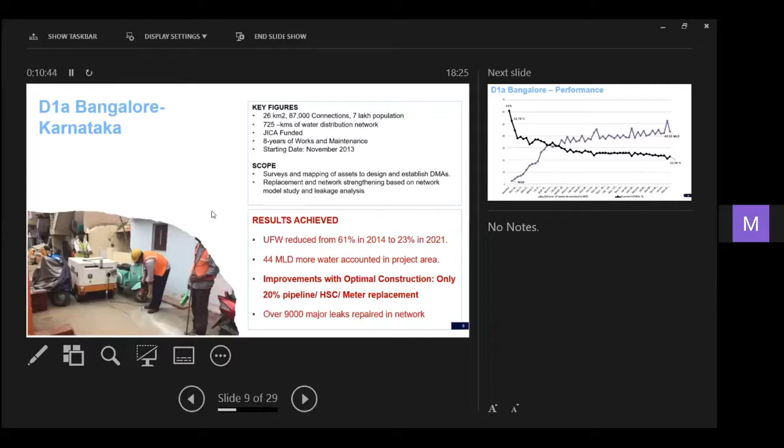It's stuck. Maybe just 1 second. I'm sorry, my laptop is stuck.

Yeah, okay. So as you can see from this slide, when we took over the project, I would say the initial baseline was 61%. And as we completed construction and while we are maintaining through a very, very intensive leak detection process, the UFW as of March 21 is 23%. So there is a kind of reduction which we have managed to achieve.

Here again, as I said, the project was a loss reduction contract, and that was the metric, that was the KPI. Since this was the UFW project, we have actually managed to go from almost 2 MLD of accounted for water to, as of March 21, about 43-44 MLD of water which is accounted for. That is the kind of volume of water which now can be used to supply more to the same area.

So, similarly, Davanagere, I will use this as an example to explain how a typical contract in Karnataka is. This is a standard ADB structure. Many of you probably would know it's about a 3-4 hour drive from Bangalore city on the Bangalore-Pune highway. It's got a population of 500,000 people with about 100,000 connections.

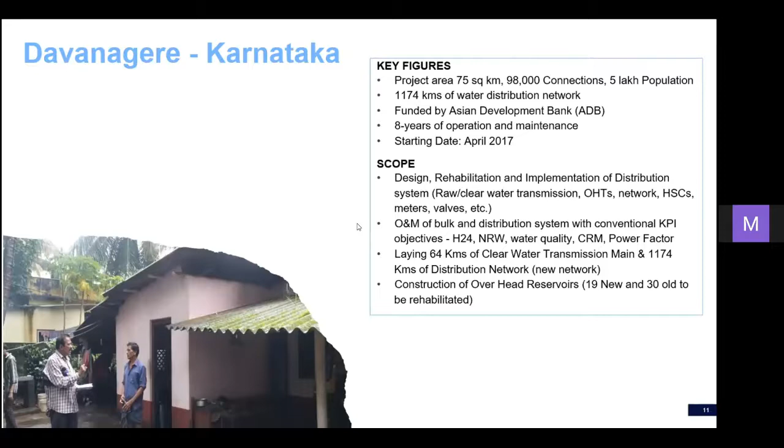Okay, this is the ADB funded project and the project has got 4 phases. The contract very clearly spells out the 4 phases over the 12-year contract period. Here the tender said that the consultant had done an intensive study for 2 years before they made the DPR, on the basis of which the tender has been launched. So they didn't want the operator to come in and spend another 1 year in the study period.

So what they said is that we give you only 5 months, which is not a full-fledged design phase. It's a design validation phase. Because the consultant had not done 100% of customer survey, you are supposed to do that. Whether it's possible or not in such a short span, that's a different argument. But the tender document talks about 5 months of design validation phase.

And if there is some discrepancy that we find, we have to point it out to the client, and then there can be some changes in the BOQ or some extra claims and so on. But as far as possible, you stick to the design or the BOQ which is given by the client in the tender document. Then we have a 36-month, 3 years of the works phase.

Mind you, here again, it's a DMA approach. So this is also something which is prescriptive. I think there are about 50 odd DMAs. So the client wants us to implement and commission those 54 DMAs over a period of time.

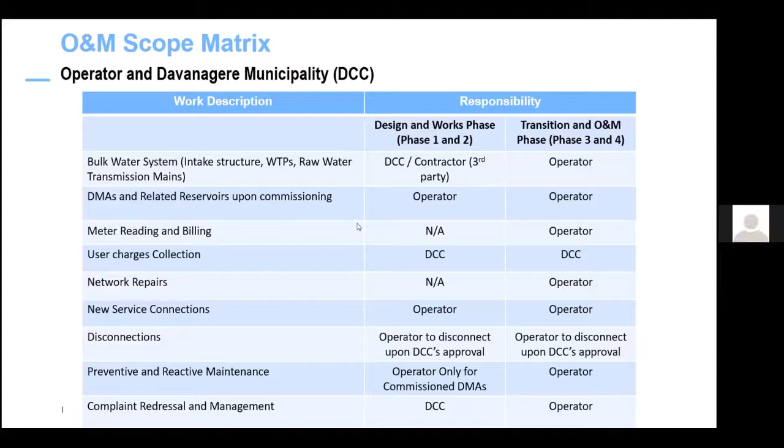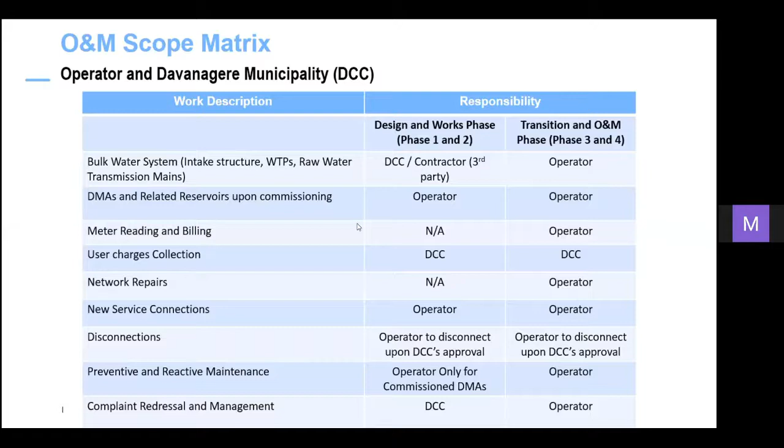That's right. So this is the main part. So this is how we actually are responsible. The O&M matrix clearly spells out that we are responsible for meter reading and billing. For some reason, collection is kept by Davanagere Council themselves. They will be responsible for it, which I can tell you is something we don't like. As an operator, we would also like to be responsible for collection, because then it ensures that the client will have the funds to pay us the O&M fee.

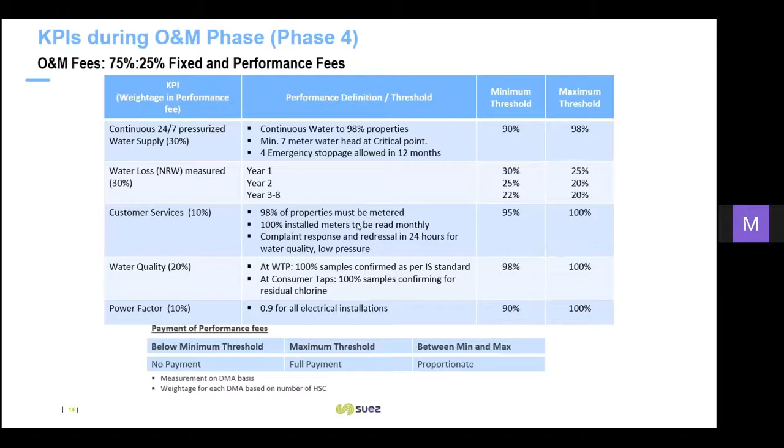So here, the performance during the O&M phase is governed by the fixed and the performance fee. There's a 75-25 fixed and performance fee split. The 25% performance fee is divided further into continuous water supply, NRW reduction, customer services, water quality, and so on. So that's how, very mechanically, the client has decided to structure the project and has prescribed an approach which the bidder is supposed to follow during the execution phase.

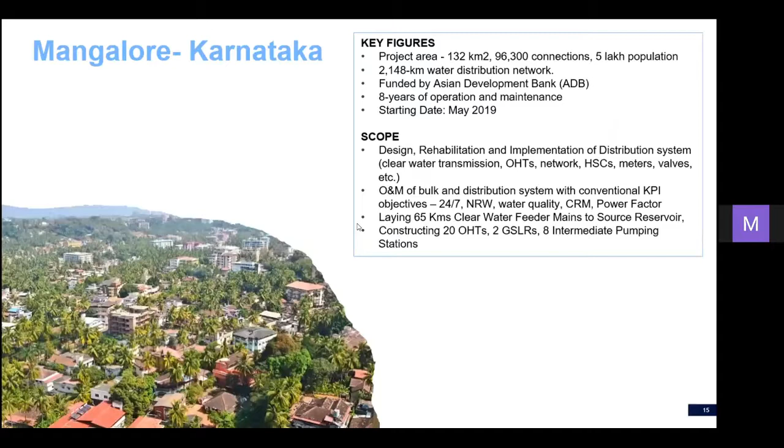The same structure is there in Mangalore, Udupi, Puttur. So I will not repeat those things, but this is a structure which we have achieved. As I said, we started these projects in 2017-18. It's still work in progress because not much construction could be done during the last 2 years, mainly affected by the COVID pandemic. But I would also briefly explain some of the KPIs and other service delivery metrics that we have achieved in other projects.

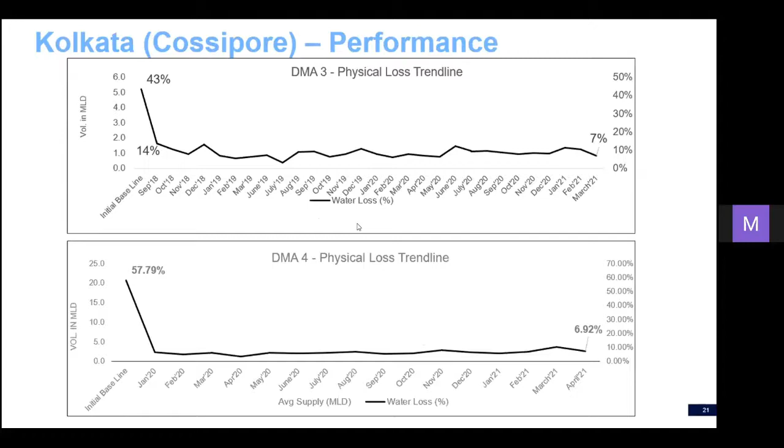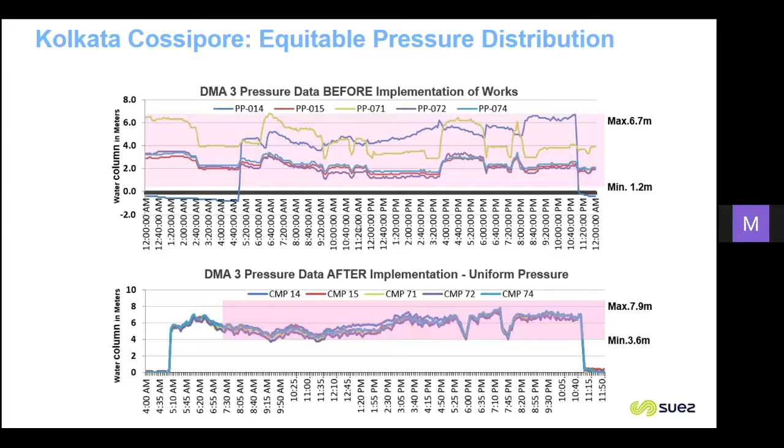Similarly, 24/7 projects are not just about engineering. There is a lot of social campaigning, social work, explanation, IEC campaigns that one wants to carry out. In Calcutta, where there was no history of meter reading or metering, there was a very, very good initiative called Jal Bandhu, which is a women's group, which actually explained and did a lot of advocacy work for promoting water conservation.

Okay, so as I said, learnings and way forward. What we have learned from all these. If you ask me which project structure we think is better for a country like India, I would say a design build operate structure like Coimbatore is much better, because it gives flexibility to an operator like us to bring in our skills. We can use our R&D, we can use our software, we can use our digital tools, we can help in optimizing the capex, and saving of that capex means that the client actually gains. So this actually gives us much more flexibility to do well in the project.

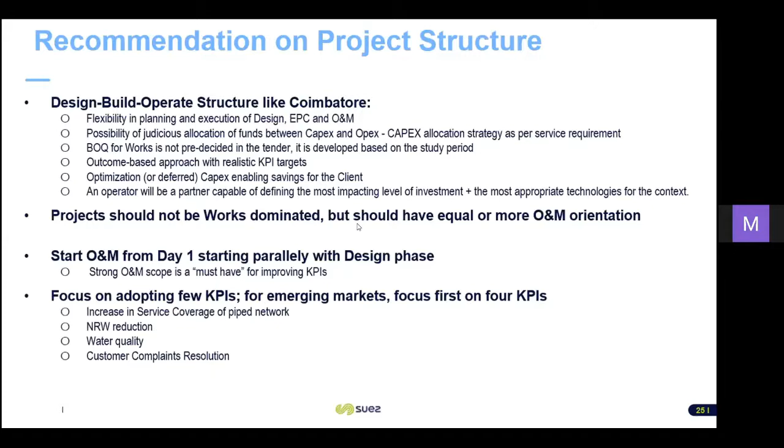I would again say that most of the projects in India, and this is unfortunately the case in most of the cities, are more about infrastructure creation. They are works dominated. But I would say that we should have equal or more O&M orientation, so as to ensure 24/7 supply or improvement in service delivery. For that, it's very important to start O&M right from day one, parallelly with the design phase, which I would think is one of the most important aspects.

And whenever we start a new project, my recommendation and my suggestion would be, don't get bogged down by data challenges. In India, we have a history of situations where not much effort or emphasis was there on asset management or improvement in operational data. There was not much emphasis on collecting data and looking at the holistic picture of water distribution. But data quality on assets will improve over time, and that's why when we start O&M initially, even parallel to the design phase, it helps us use the available ground data for better design and BOQ optimization. It helps us in streamlining the coordination, prioritization, and sequencing of project activities.

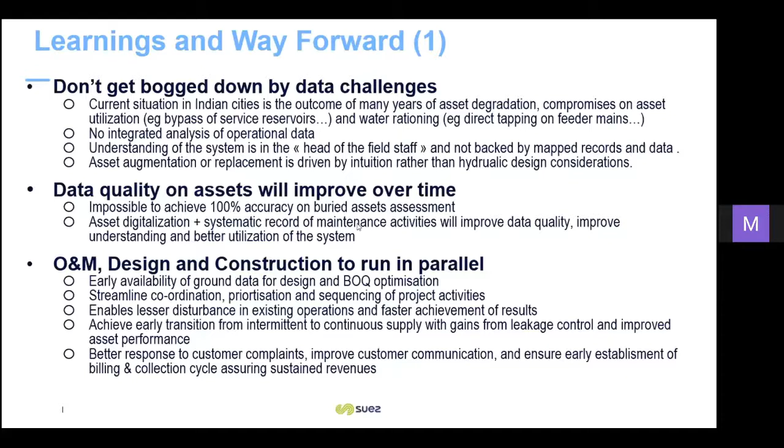And most importantly, even before we complete construction, we would have done a lot of work on leakage control and improved asset performance. That would help us in early transition, early switchover from intermittent to continuous water supply. It looks very simple, but these are some of the small things that, if paid attention, especially as I said earlier, the bulk water supply, one needs assured bulk water supply, active leakage control measures, commercial loss reduction, so as to achieve a demand management driven system.

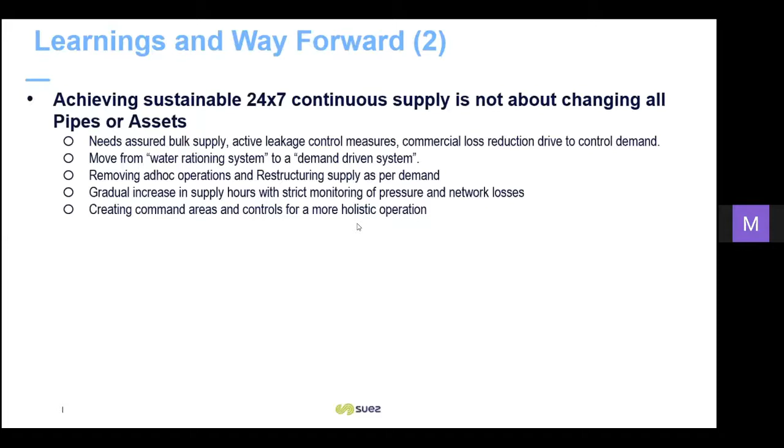Today in India, most of the cities follow the water rationing system. We have to switch to the demand driven system. We have to get over this habit of ad hoc operations, where we do everything based on intuition. We have to move over to a system where we have most of the data, we look at it holistically, and actually plan for infrastructure and service delivery much ahead of its time.